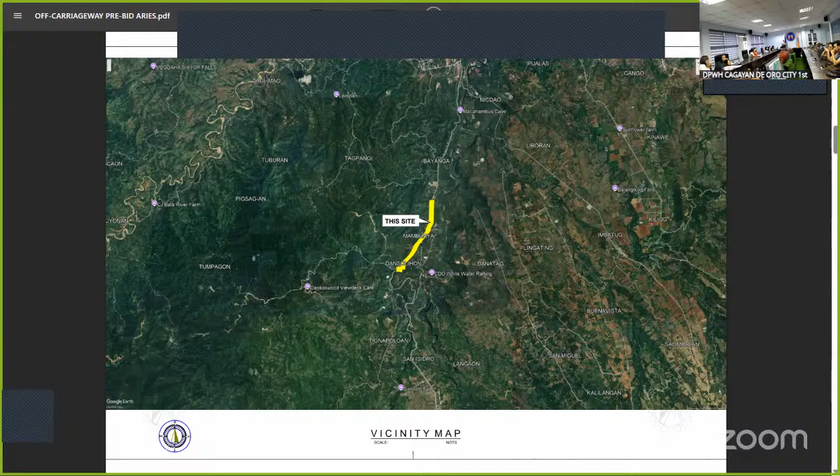For the general drawing, this is the vicinity map. It is located in Barangay Mambuaya and Barangay Dansolihon. This is the site development plan, wherein you can see the beginning and end section. These are the site images, showing the beginning and the end section.

For our typical drawings, the scope of work includes construction of sidewalk at the 15-meter offset with curb and gutter, and a shoulder of 2 meters, on both sides. There's also installation of solar LED roadway lightings, and we will be installing pavement markings throughout the net length of this project.

These are the PCCP details and geometric design standard drawings.

For the summary of quantities: provision of field office for the engineer, 7.47 months; permits and clearances, 1 lump sum; project billboard and signboard, 4 each; occupational safety and health program, 1 lump sum; traffic management, 5.5 months; mobilization and demobilization, 1 lump sum.

Surplus common excavation, 7,740 cubic meter; structure excavation common soil, 5,094.59 cubic meter; embankment from roadway structure excavation, 412.8 cubic meter; gravel fill, 982.27 cubic meter; aggregate base course, 3,440 cubic meter; Portland cement concrete pavement, unreinforced, 0.28 meters thick, 17,200 square meter.

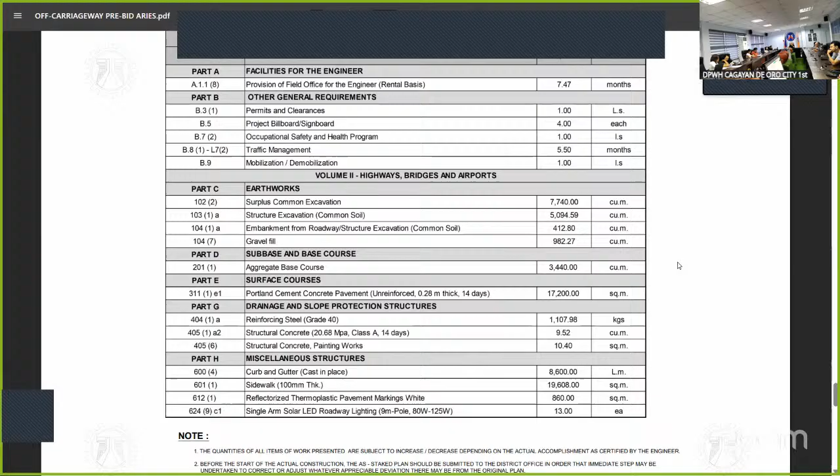So let me continue. So we have here the minimum equipment requirement. Backhoe, 1 leased. Dump truck, 2 leased. Bulldozer, 1 leased. Payloader, 1 leased. Motorized road grader, 1 leased. Vibratory roller, 1 leased. Water truck pump, 1 leased. Plate compactor, 1 owned. Transit mixer, 4 leased. Concrete vibrator, 2 owned. Concrete batch plant, 1 leased.

Concrete screeder, 1 owned. Concrete saw, 1 owned. Bar cutter, 1 owned. Joint sealer machine, 1 leased. Bar bender, 1 owned. 1-bagger mixer, 1 owned. Truck mounted crane, 1 leased. Cargo service truck, 21 to 25 metric ton, 1 leased. Cargo service truck, 2 to 5 metric ton, 1 leased. Cargo service truck, 9 to 10 metric ton, 1 leased.

Applicator machine, 1 leased. Kneading machine, 1 leased. Material testing apparatus, 1 owned. Two-way radio, 2 owned. And barricade flasher light, 11 owned. So for our pay items, we have here provision of the field office for the engineer, rental basis. The inclusion of this pay item is a 20-footer container van with ACU, furnished and maintained, or equivalent, with 3

tables and 3 chairs. So for the permits and clearances, these include NCIP permits and clearances as per memo order number R10 FBV 00395 series of 2025. And also you can see the specifications for our single arm solar LED roadway lightings. So again, the attachment of our road right of way of this project is still under ongoing investigation. So finalization of this project will be posted for the bid bulletin.

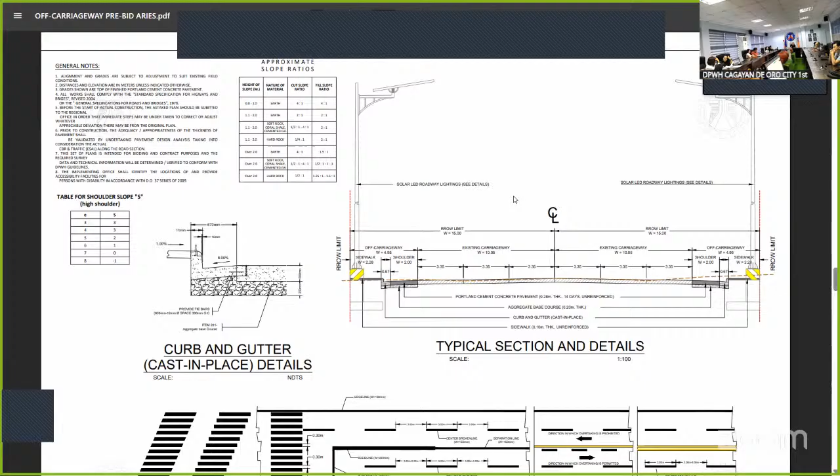Thank you, Engineer Harris. So do we have any questions or clarifications regarding the discussions of this project? Understand? How about from our online viewers? So since there's no questions regarding this project, now let's proceed to our second project.

26KH0078. Construction of public solar water system at Barangay Besigan, Cagayan de Oro City, Misamis Oriental. With approved budget for the contract of 9,898,808 pesos and 88 centavos. The details of this project will be discussed by Engineer Martin John Luis Amis. Can you now proceed, Engineer Martin.

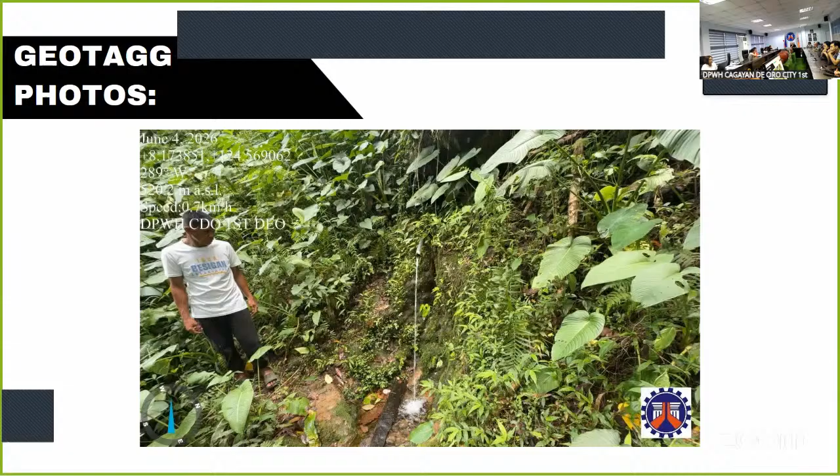Good afternoon, everyone. I will be discussing the construction of public solar water system at Barangay Besigan, Cagayan de Oro City. So this is the project location, located near Besigan Elementary School and Besigan National High School. These are the sample photos for the water source near the Besigan Elementary School. And this is the location for the water tank for the said project.

Typical details. So this is the sample perspective of the project. We have the control room, the panels for the solar and the water tank. This is the typical plan for the water tank. The ladder rung at 0.30 on center. We have the tie beam.

This is the plan for the concrete valve box consisting of 100 mm diameter gate valve, 75 mm diameter water meter, and a 75 mm diameter pipe to the consumers. Tie beam detail. We have the support at 320 mm diameter. We have the tie beam detail, the footing tie beam detail, and the reinforced beam detail.

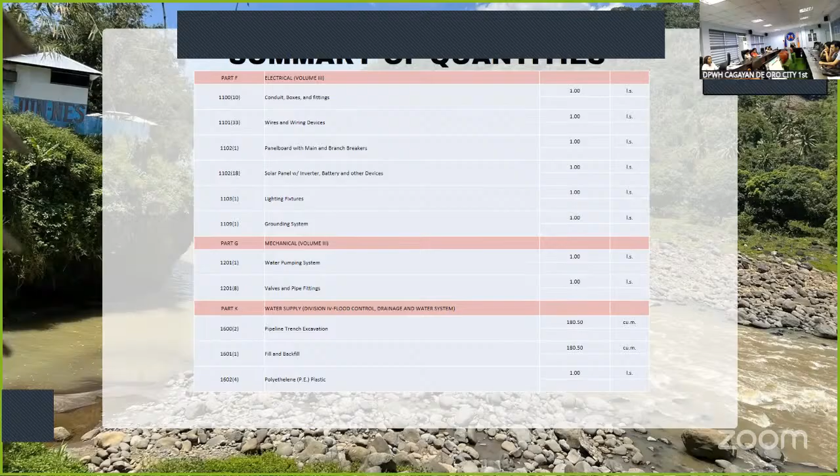For the electrical, conduit boxes and fittings, 1 lump sum. Wires and wiring devices, 1 lump sum. Panel board with main and branch breakers, 1 lump sum. Solar panel with inverter, battery and other devices, 1 lump sum. Lighting fixtures, 1 lump sum. Grounding system, 1 lump sum. Water pumping system, 1 lump sum. Valves and pipe fittings, 1 lump sum. Pipeline trench excavation, 180.50 cubic. Fill and backfill, 180.50 cubic. Polyethylene plastic, 1 lump sum.

Provision of field office for the engineer, rental basis: 40-footer container van with ACU, furnished and maintained, including 1 table and 3 chairs. Permits and clearances: building permit, electrical permit, mechanical permit, excavation permit, National Commission on Indigenous Peoples, and other miscellaneous. Formworks and false works: H-frame, shoring jack, adjustable U-head jack, adjustable base jack.

Cold water lines: reservoir tank, 50 mm diameter GI pipe, 50 mm by 90 degree GI elbow, 63 diameter GI pipe schedule 40, 50 mm by 30 GI nipple, 50 mm diameter drain plug, water meter, concrete valve box, Teflon tape.

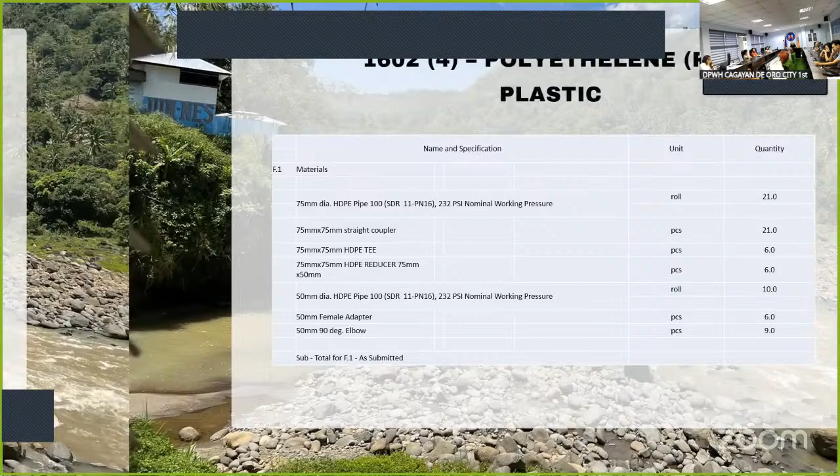Solar panel with inverter, battery, and other devices. So we will be using 550 watts monocrystalline solar panels, quantity 24, having a 3-phase 230 volts, 60 Hz Solis inverter, current transformers, and a 5.12 kilowatt battery. Polyethylene plastic: we will be using a 75 mm diameter pipe, 232 PSI nominal working pressure.

So equipment: 40-footer container van with ACU furnished and maintained, plate compactor, 1 lease, dump truck, 2 lease, boom truck, 1 lease, water truck, pump all models, 1 lease, bulldozer, 1 lease, payloader, 1 lease, backhoe, 1 lease, bar cutter, 1 owned, bar bender, 1 owned, 1 bagger mixer, 1 owned, concrete vibrator, 1 owned, cutting outfit, 1 owned, motorized road grader,

1 lease, drilling machine rig, 1 lease, cargo truck, 1 lease, material testing apparatus, 1 set owned, trailer for minor tools, 1 lease. That's all. Thank you.

Thank you, Engineer Martin. So do we have any questions or clarifications? Yes, sir. Good afternoon, sir.

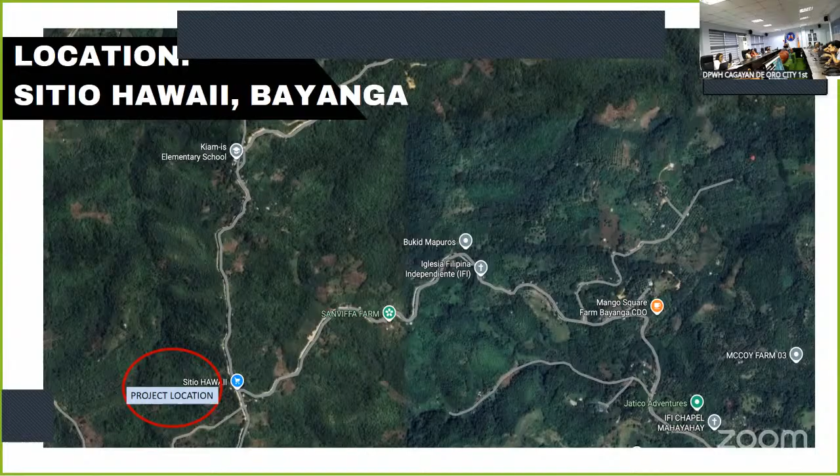Good afternoon, everyone. I will be discussing the project construction of public solar water system at Barangay Bayanga, Cagayan de Oro City. The content of this presentation is the project location, typical details, and the quantities. First is the location. The project is located in Bayanga. You can see it in the location map. And these are the site pictures as shown. The typical details of the project.

This is the elevation of the groundwater tank, the front view and the typical side view. This is the rear view and the typical section. And the details of the concrete valve box. Also, these are the details of the foundation plan, 3.4 by 3.4 meters, the beam details, the manhole details, and the reinforced beam detail.

This is the detail of the powerhouse: the front elevation, rear elevation, and the left side elevation. The height of the powerhouse is 3.74 meters with a dimension of 5 meters by 4 meters. And these are also the details of the tank stand, the details of the solar panel, concrete pedestal details, the powerhouse lighting layout, the single line diagram, and the details of the fence, which is 1.5 by 2.8.

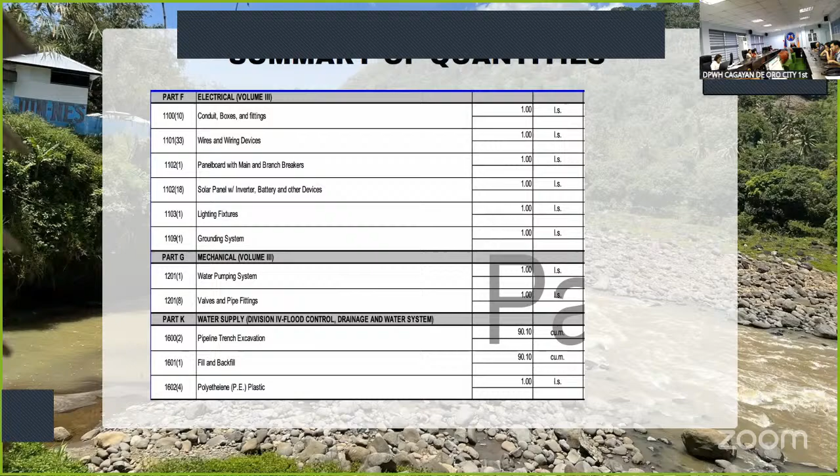Item 11-03-1, lighting fixtures, 1 lump sum. Item 11-09-1, grounding system, 1 lump sum. Item 12-01, water pumping system, 1 lump sum. Item 12-01-8, valve and pipe fittings, 1 lump sum. Item 1600-2, pipeline trench excavation, 90.1 cubic meter. Item 1601-1, fill and backfill, 90.1 cubic meter. Item 1602-4, polyethylene PE plastic, 1 lump sum.

This is the detail of the DUPA. The provisional field office for the engineer contains a 40-footer container van with ACU furnished and maintained, including 1 table and 3 chairs. This is the permits and clearances: the building permit and Bureau of Fire, drinking water analysis, electrical permit, mechanical permit, excavation permit, National Commission on Indigenous Peoples, which is the rituals and ceremonies, and miscellaneous and other expenses.

And this is the details for formworks and falseworks. And the details for cold water lines, reservoir tank, 50 mm diameter GI pipe, 50 mm by 90 mm diameter GI elbow, 60 mm by 63 mm GI pipe schedule 40, 8 pieces, 60 mm 90 diameter GI elbow, 4 pieces, 50 mm by 30 GI nipple, 2 pieces, 50 mm drain plug, 2 pieces, water meter, 1 concrete valve box, and 50 pieces platform tape.

Finishing hardware contains doorknob, 1 piece, and 4x4 loose pin hinges, 2 pieces. And the conduit boxes and fittings: 38 pieces, 30 meter by 20 mm diameter PVC conduit, 6 lengths of 3 meters, 32 mm diameter rigid steel conduit, 6 pieces, 40 mm diameter PVC conduit, 12 pieces PVC utility box, 8 pieces PVC junction box with cover, 1 piece 3/4 inch service entrance cap, 1 length 3/4 IMC, 5 GI conduit clamp, 1 kilowatt-hour meter, 10 20 mm diameter PVC coupling, 6 40 mm diameter PVC coupling, 1 flexible hose, 1 roll flexible hose.

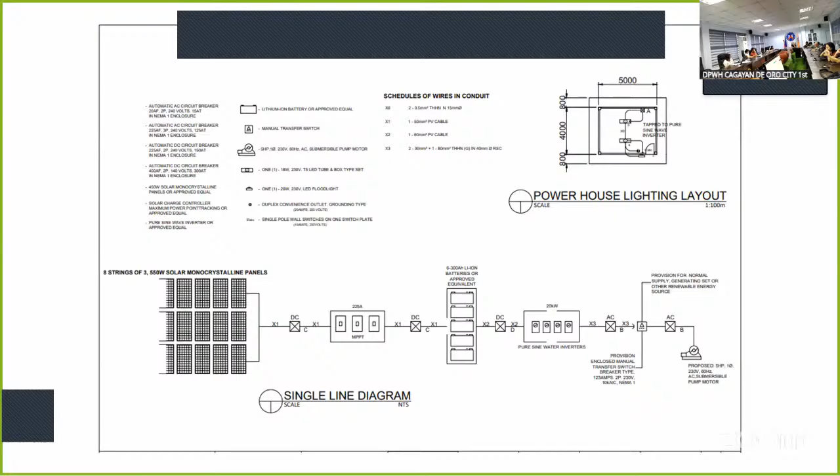We also have the details of the tank stand, which is 1.5 by 1.5 meters. The standard array PV module support layout. Solar panel concrete pedestal details. We also have the fence detail, the fence foundation and column details. So for the quantities of this project, the ABC of this project is 10,889,365.77. The calendar days of this project is 180 calendar days.

So summary of quantities: provision of field office for the engineer 6 months, project billboard, occupational safety and health program 1 lump sum, mobilization, demobilization 1 lump sum, clearing and grubbing 0.9 hectares, fencing chain link fence fabric 60 linear meter, structure excavation common soil 59.9 cubic meter, embankment from borrow 51.74 cubic meter, gravel fill 4.59 cubic meter.

Structural concrete class A 28 days 60.7 cubic meter, lean concrete 4.59 cubic meter, reinforcing steel deformed grade 40 4,195.22 kilograms, reinforcing steel deformed grade 60 3,480.83 kilograms, formworks and falseworks 1 lump sum, cold water lines 1 lump sum, plumbing works 1 lump sum, finishing hardware 1 lump sum, cement plaster finish 520 square meter.

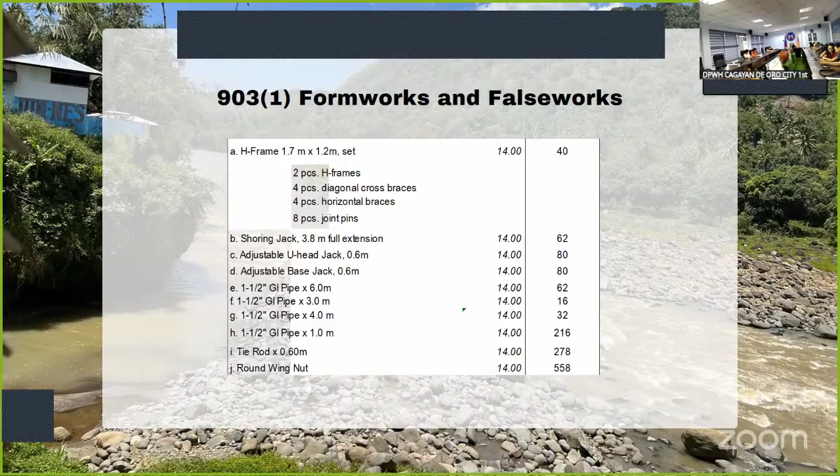Summary of lump sum of the following. Provision of the field office for engineers, 40-footer container van with ACU furnished and maintained, including one table and 3 chairs. So these are the materials or equipment for occupational safety and health. And for the formworks and falseworks. We also have the cold water lines, which is for reservoir tank, 50 mm diameter GI pipe, 50 mm by 90 mm diameter GI elbow, 63 mm diameter GI pipe, schedule 40.

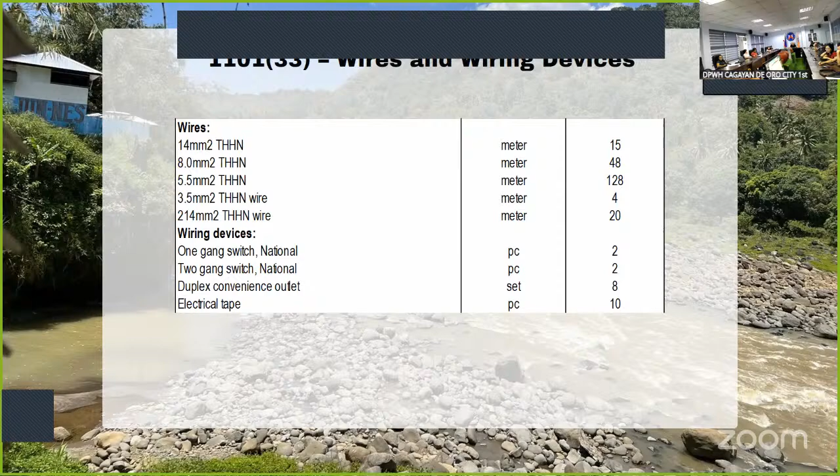We also have for the finishing hardware, door knobs, 4x4 loose pin hinges. For the conduit and boxes and fittings, for the wires and wiring devices, we also have for the panel board and main and branch breakers. And for the solar panel with inverter, battery, and other devices.

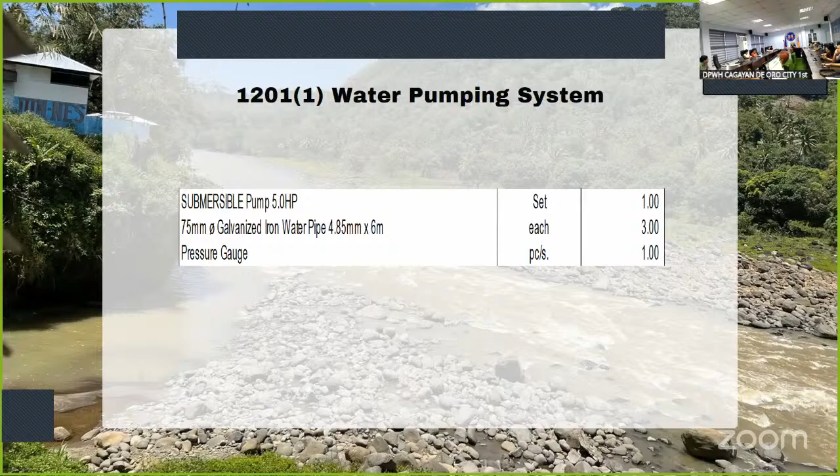For lighting fixtures, grounding system, water pumping system, valves and pipe fittings, and for polyethylene plastic, we also have 75 mm diameter pipe.

And for the equipment: plate compactor, 1 lease; dump truck, 2 lease; boom truck, 1 lease; water truck, 1 lease; bulldozer, 1 lease; payloader, 1 lease; backhoe, 1 lease; bar cutter single phase, 1 owned; bar bender 3 phase, 1 owned; bagger mixer, 1 owned; concrete vibrator, 1 owned; cutting outfit, 1 owned; motorized road grader, 1 lease; drilling machinery, 1 lease; cargo service truck, 1 lease; material testing apparatus, 1 set owned; trailer for minor tools, 1 lease.

That's all for this project. Thank you.

Thank you, Engineer Francis. Okay, is this project also still subject for approval? Do we have any clarifications? Understand? Our online viewers understand. Okay, thank you. Since there are no more questions regarding this project, let's now proceed to our 5th project.

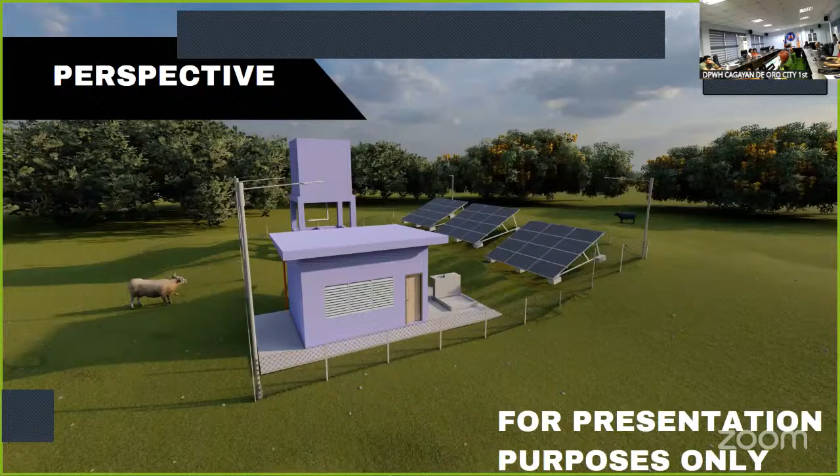This is the project location. Geotag photos - this is the source, and this will be the location for the water tank. Typical details, perspective, water tank typical details, the rear view, concrete valve box, control panel, a tank stand perspective, solar panel concrete pedestal details, the fence details, and the quantities.

So summary of quantities: provision of field office for the engineer, rental basis, 6 months. Project billboard signboard, 2 each. Occupational safety and health program, 1 lump sum. Mobilization, demobilization, 1 lump sum. Clearing and grubbing, 0.45 hectares.

Fencing, chain link fence fabric, 60 linear meter. Structure excavation, common soil, 59.9 cubic meter. Embankment from borrow, 51.74 cubic. Gravel fill, 4.59 cubic. Structural concrete class A, 28 days, 60.70 cubic. Lean concrete, 4.59 cubic. Reinforcing steel deformed grade 40, 4,195.22 kilograms. Reinforcing steel deformed grade 60, 3,480.83 kilograms. Formworks and false works, 1 lump sum.

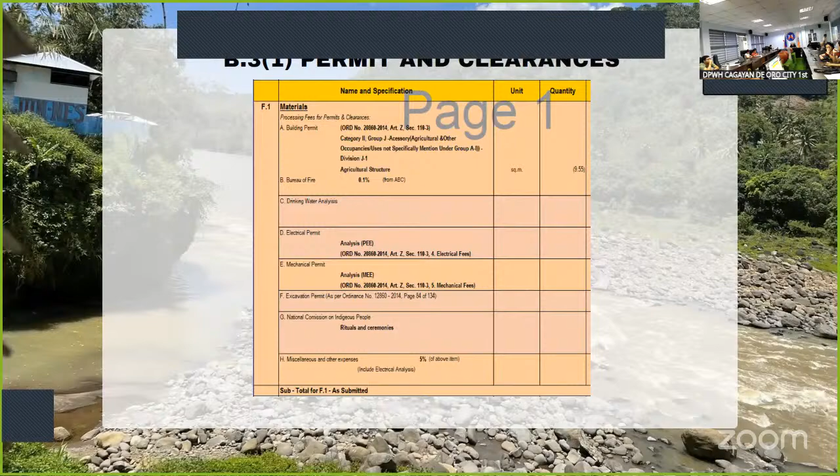Provision of field office for the engineer, rental basis: 40-footer container van with ACU, furnished and maintained, including 1 table and 3 chairs. For the permits and clearances, formworks and false works, cold water lines, finishing hardware, conduits boxes and fittings, panel board with main and branch breakers, lighting fixtures, grounding system, water pumping system, valves and pipe fittings, solar panel with inverter, battery and other devices, polyethylene plastic.

Equipment: plate compactor, 1 lease; dump truck, 2 lease; boom truck, 2 lease; water truck, 1 lease; bulldozer, 1 lease; payloader, 1 lease; backhoe, 1 lease; bar cutter, 1 owned; bar bender, 1 owned; bagger mixer, 1 owned; concrete vibrator, 1 owned; cutting outfit, 1 owned; motorized road grader, 1 lease; drilling machine rig, 1 lease; cargo truck, 1 lease; material testing apparatus, 1 set owned; 1 trailer, 1 lease. That's all.

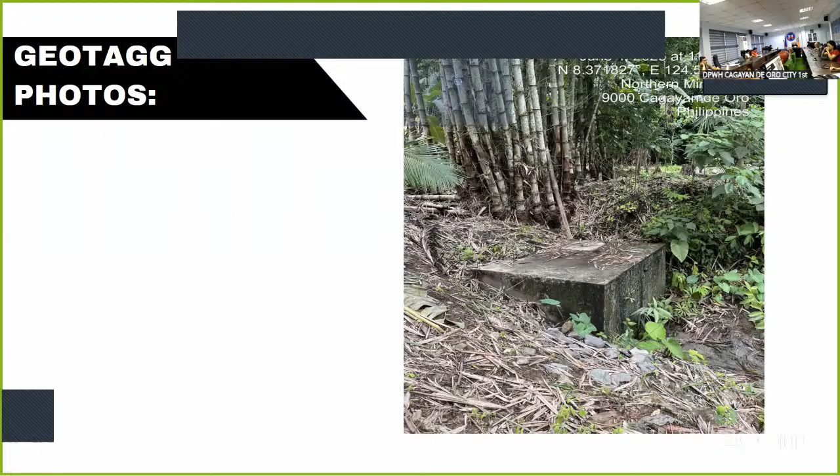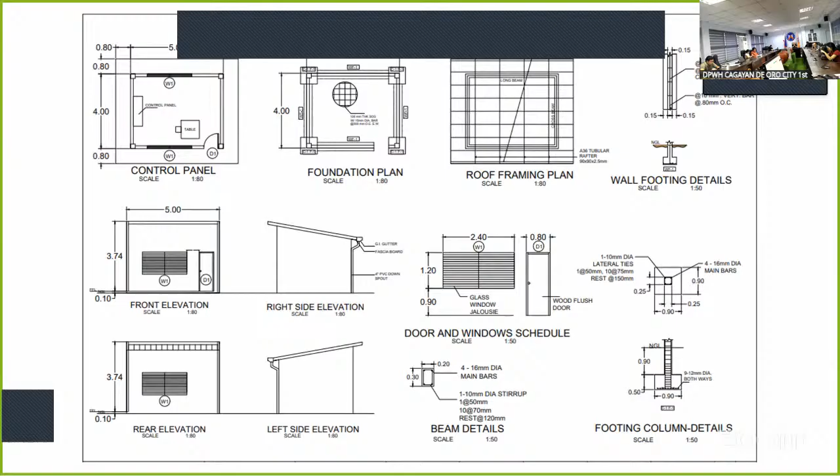For the details of our foundation plan, we will have 3.4 by 3.4, having a tie beam of 20mm reinforcing bar and 220mm for the bottom bars. For our control panel, we'll have a dimension of 4 meters by 5 meters, having a height of 3.74 from the top of our slab.

For the top stand, having a dimension of 1.5 by 1.5, we'll provide 8 tap stands. The location will depend on the end user. This is the detail of our solar panels. For the fencing detail, we'll use 2 inches by 2 inches cyclone wire, spaced at 2 meters, having a pedestal of 0.3 and using a GI pipe of 1 and 1/2 for the column.

For the quantities, this is the approved budget of the contract. We have 9,898,808.81 with a calendar duration of 180 days.

For the summary of quantities: provision of field office for the engineer, 6 months. Permit and clearances, 1 lump sum. Project billboard, 2 each. Occupational safety and health, 1 lump sum. Mobilization and demobilization, 1 lump sum.

Clearing and grubbing, 0.45 hectares. Fencing, chain link fence fabric, 60 linear meters. Structure excavation, 59.9 cubic meters. Embankment from borrow, 51.74 cubic meters. Gravel fill, 4.59 cubic meters.

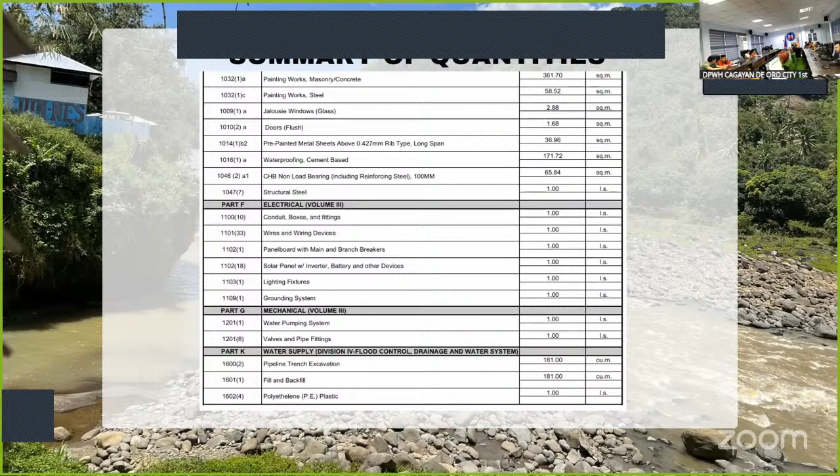Pipeline trench excavation, 181 cubic meters. Fill and backfill, 181 cubic meters. Polyethylene plastic, 1 lump sum.

For our cold water lines, this is the fittings for our reservoir tank. For the finishing hardware, for our control panels. Then for the conduit, boxes and fittings, these are the details as shown.

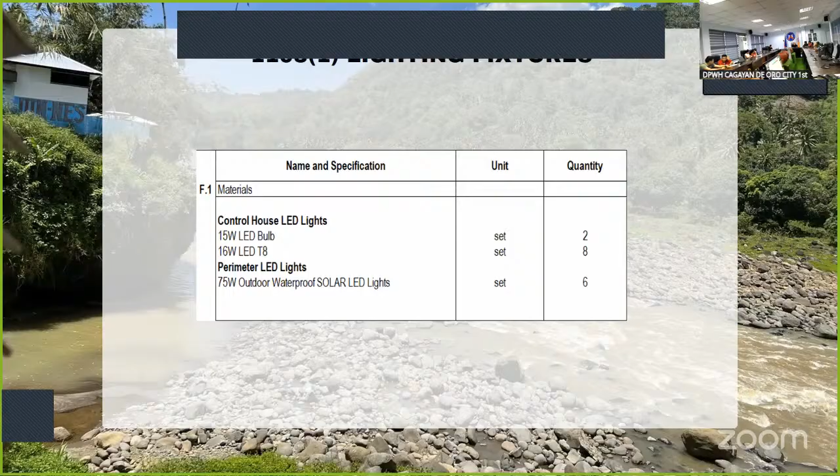For the wires and wiring devices, and the panel board with main and branch breaker. For the lighting fixtures, for the control house, we'll use a 15 watt LED bulb, 16 watt LED tube, and we'll use solar LED light, 75 watts, for the outer fence. For the grounding system, these are the details.

For the water pumping system, we will use a submersible pump, 5 HP, to cater to the elevation head of 40 meters.

So this is the equipment requirement. As shown, we'll have a plate compactor, 1 lease, dump truck, 2 lease, boom truck, 1 lease, water truck, 1 lease, bulldozer, 1 lease, payloader, 1 lease, backhoe, 1 lease, bar cutter, 1 owned, bar bender, 1 owned, one-bagger mixer, 1 owned, concrete vibrator, 1 owned, cutting outfit, 1 owned, motorized road grader, 1 owned, cargo service truck models, 1 lease, material testing apparatus, 1 set owned, trailer for equipment, 1 lease.

Good afternoon once again, everyone. Presenting contract ID 26KH0083 with a project title of Construction of Public Solar Water System at Barangay Baikingon, Cagayan de Oro City, Misamis Oriental, with a calendar days of 151 days. Location, Barangay Baikingon, Cagayan de Oro City, with the approved budget for the contract of 9,898,120 pesos and 67 centavos.

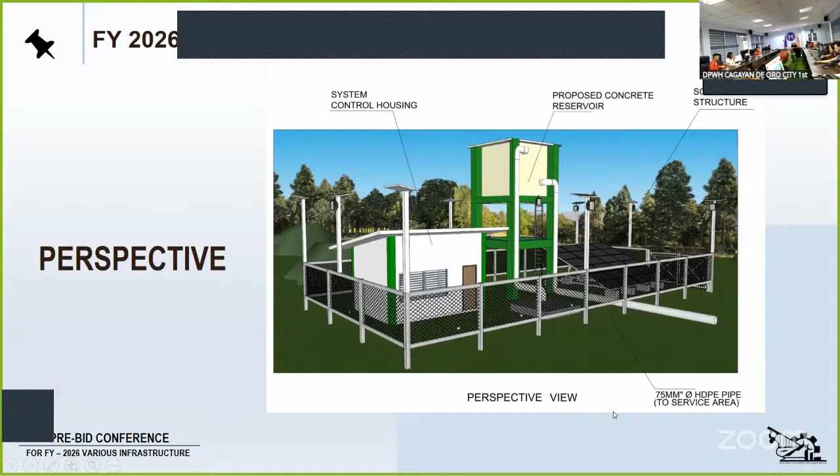Scope of work is the construction of solar water deep well. This is the location. Landmark is at Ibal Store, 100 meters to their barangay hall, before their barangay hall. This is the site photo. And this is the proposed perspective with a control house, concrete reservoir, solar structure, and the HDPE pipe.

This is the typical detail for deep well. Please note that georesistivity test is included in this with the depth of 100 meters. This is the proposed concrete reservoir, the control house, the solar panel, and retaining wall.

This is the top stand details and the perspective with length, HDPE pipe length of 990 meters and a total number of tap stand 11 pieces.

For the summary of quantities, Part A, A1.18, provision for a field office for the engineers, rental basis, 5.03 months. And for Part B, B.5, project billboard signboard, 4 each. For B.7(2), occupational safety and health program, 1 lump sum. For B.9, mobilization and demobilization, 1 lump sum. And for Part H, the miscellaneous structure, item 604.2, fencing chain link fence fabric.

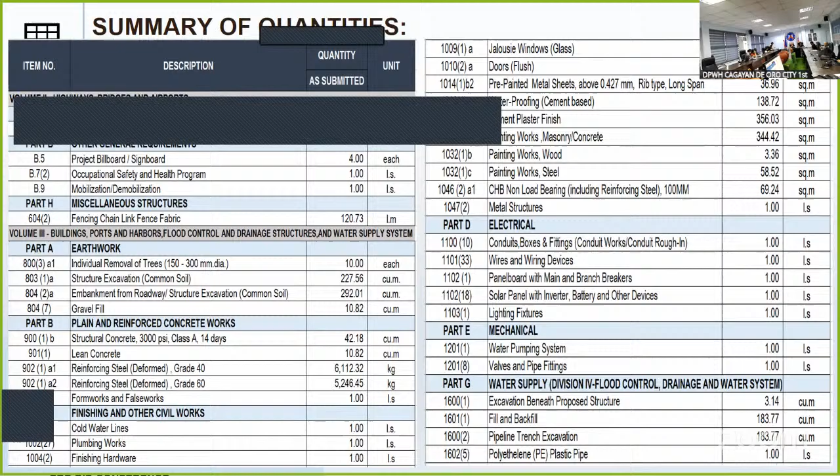And for item 1103, 1 lighting fixtures, 1 lump sum. And for part E, mechanical, 1,201, 1 water pumping system, 1 lump sum. And for item 1,201, 8 valves and pipe fittings, 1 lump sum.

And for part G, 1,600 1 excavation beneath proposed structure, 3.14 cubic meters. And for item 1,601 fill and backfill, 183.77 cubic meters. And for item 1,600 2 pipeline trench excavation, 183.77 cubic meters. And lastly, for item 1,602 5 polyethylene plastic pipe, 1 lump sum.

And for the minimum equipment requirement: trailer for equipment, 1 leased; plate compactor, 1 leased; dump truck, 2 leased; boom truck, 1 leased; water truck pump, 1 leased; bulldozer, 1 leased; payloader, 1 leased; backhoe HD 823, 1 leased; bar cutter single phase, 1 owned; bar bender 3-phase, 1 owned; chainsaw, 1 leased; 1 bagger mixer, 1 owned; concrete vibrator, 1 owned; welding machine, 1 leased; cutting outfit, 1 owned; backhoe wheel mounted, 1 leased; motorized road grader, 1 leased; drilling rig, 1 leased; cargo service truck, 1 leased; and lastly, material testing apparatus, 1 set owned.

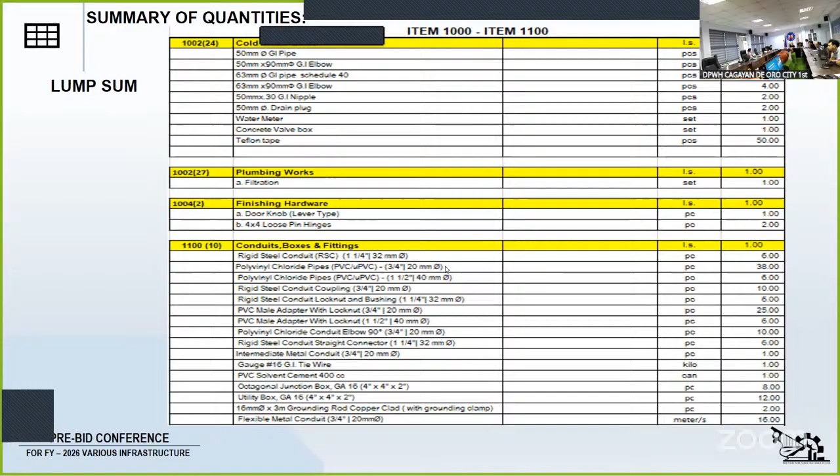And for items 1,000 to 1,100, for the cold water line, plumbing works, finishing hardware, conduit, boxes and fittings, wires and wiring devices, panel board with main and branch breakers, and solar panel with inverter, battery, and other devices, and for the lighting fixtures and lamps, and for the water pumping, the valves and pipe fittings, water pumping system, and the polyethylene plastic pipe. The quantity of this project is subject for bid bulletin. That's all for this project. Thank you.

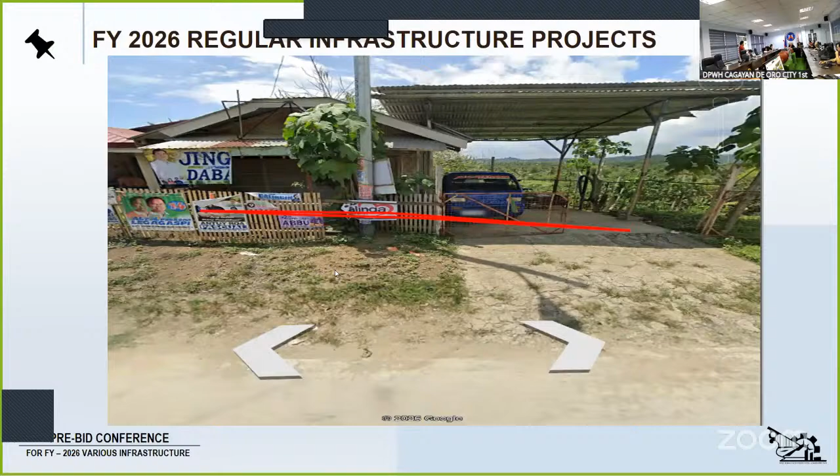Thank you, Engineer Shilani Gelfroy. Do we have any clarifications or questions? How about from our online viewers? So again, this project is subject for bid bulletin. And now let's proceed to our 8th project.

Asset preservation, construction, upgrading, rehabilitation of drainage along national roads, secondary roads, CDO-Airport-Bukidnon Road, Kilometer 1445 plus 400 to Kilometer 1446 plus 040, Cagayan de Oro, with an approved budget for the contract of 89,685,753 pesos and 82 centavos. The details of this project will be discussed by Engineer Kim Carr. You may now proceed, Engineer Kim Carr.

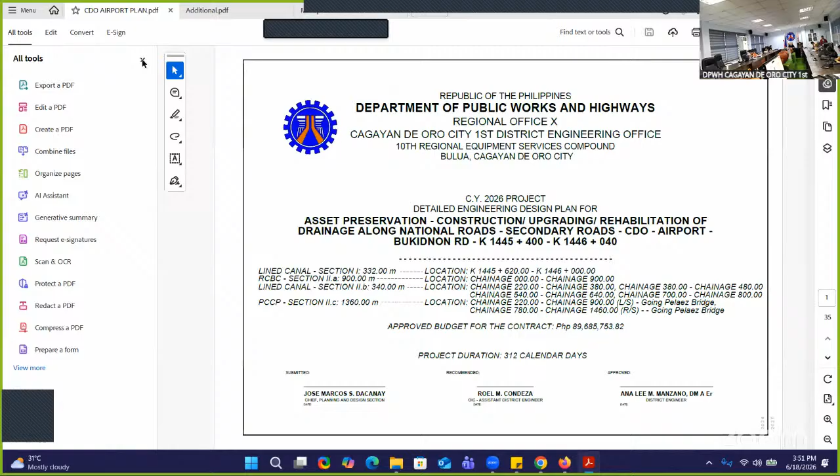Once again, good afternoon, ma'am and sirs, and to all observers and online viewers. I'll be discussing the asset preservation, construction, upgrading, rehabilitation of drainage along national roads, secondary roads, CDO-Airport-Bukidnon Road, K 1445 plus 400 to K 1446 plus 040. So these are the locations of the structures.

Lined Canal, Section 1, 332 meters, location 1445 plus 620 to 1446. The RCBC, Section 2A, 900 meters, location chainage 0 to chainage 900. Lined Canal Section 2B, 340 meters, chainage 220 to chainage 380, chainage 380 to 480. Error. Chainage 540 to chainage 640 and chainage 700 to chainage 800.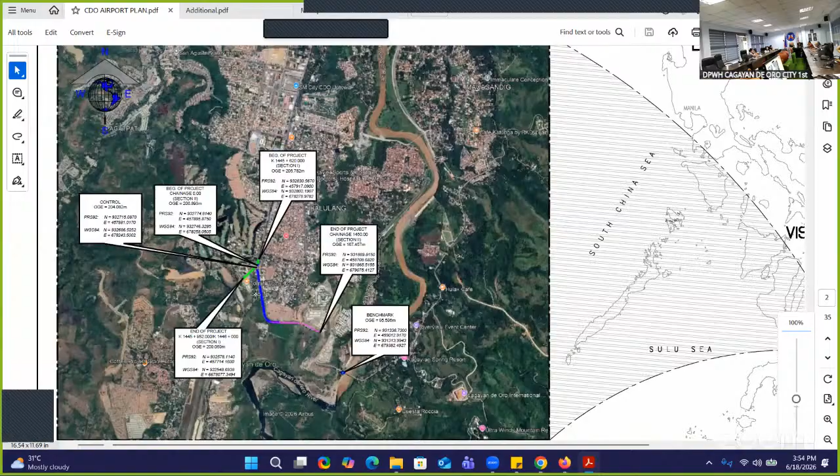This is the vicinity map. The known landmarks are the SM CDO Uptown, Thompson Toms Coffee, Xavier Heights. The location is in Taguanao. This is the location map indicating its PRS 92, or the Philippine Reference System.

This is the site development map, with its closest landmarks, Thompson Toms, Fukuro, Roseville School, Uptown. This is the Portland cement concrete pavement detail. Traffic management.

Under traffic management, we have 4 each of speed restriction, roadwork ahead, roadwork, workmen ahead, prepare to stop; temporary hazard marker 1 each; concrete safety barrier 47 each since it involves deep excavation; construction safety fence 48 each; temporary bollards at 5 meters apart 16 each. For equipment, two-way radio 2 each with lifespan consideration of 2 years, barricade flasher light 11 each.

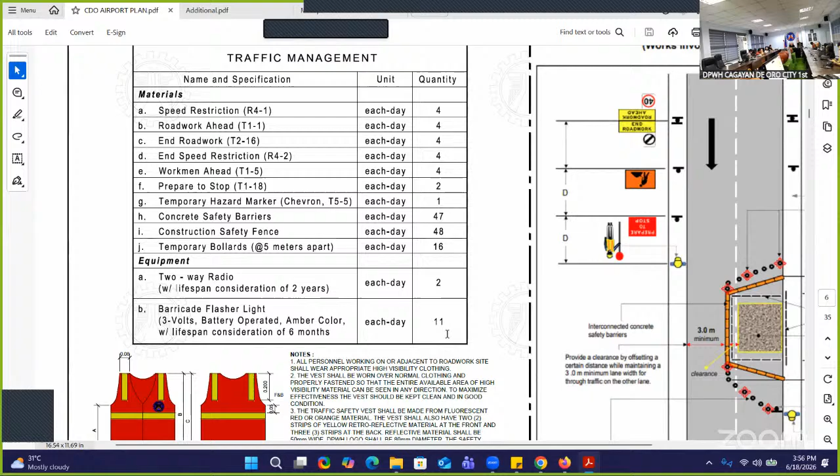This is the layout. There will be a specific traffic management layout for this project. These are the typical details under traffic management. Project billboard details. These are the typical sections, indicating the station limits and the pay items involved. We have the typical section, existing roadway with lined canal, station limit 1445 plus 620 to 1445 plus 952 or K 1446, curb and gutter and lined canal. This is the typical detail for roadway with RCBC.

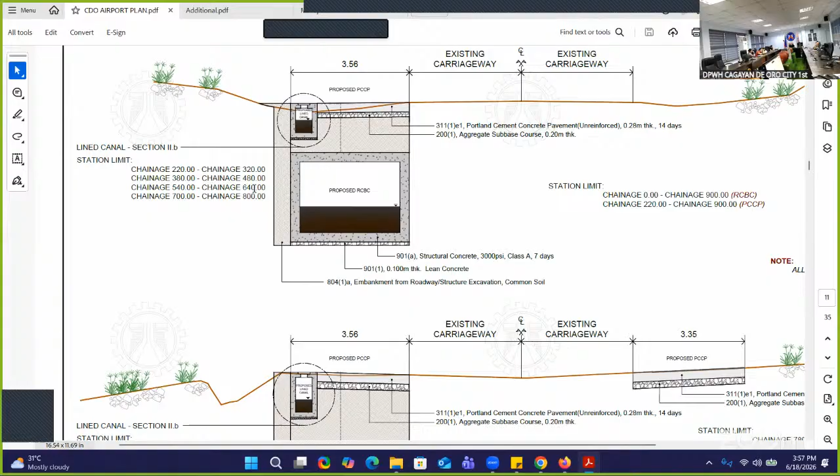So this is the typical detail for existing roadway with lined canal, PCCP, and RCBC detail. So as shown in the screen, there's a line canal which is in the front page of this plan. So lined canal section 2.b with station limits. So na siya proposed PCCP, aggregate subbase course 0.20 meter thick, structural concrete, 0.1 meter thick na lean concrete, embankment from roadway excavation, roadway structure excavation side.

So this is the typical detail for line canal. So under section station limit of K 1445 plus 620 to K 1445 plus 952. So the plan view, fixed and removable cover. So every 10 meters na siya fix. 1.20 meters is the removable cover. So this is the detail. Dimensions. Line canal detail section 2. We have the fix. RCBC schedule detail.

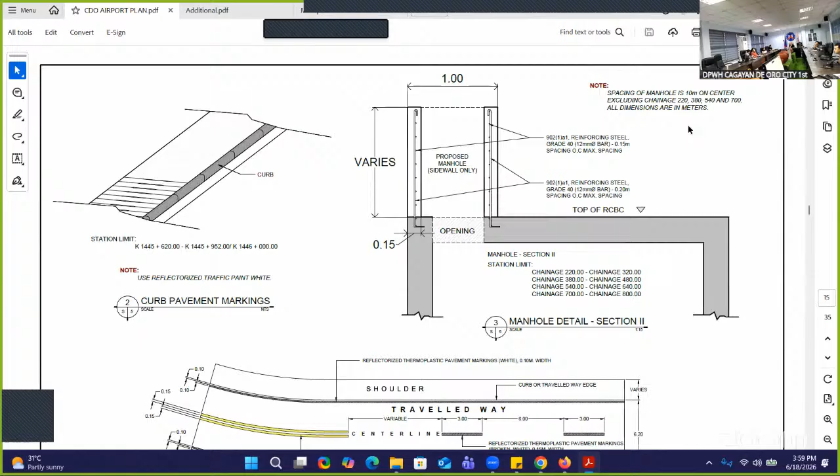Curb pavement markings. Reflectorized traffic paint white. So indicated na po ang station limits. So this is the detail for manhole. Na siya RCBC manhole, then sa taasan isang PCCP. We also have the reflectorized center and edge line marking. So naana po naka-indicate dani sa note. So edge only ang base sa PA item, edge only lang ang atong itong gamitan ng reflectorized nga white.

So this is the typical detail for the steel grating. Manhole cover for RCBC. This is the detail. Cross sections. So summary of quantities. So these are the pay items for this project. So we have E.1.18 provision of field office for the engineer, rental basis, 10.4 months. E.1.32 provision of survey equipment for the assistance to the engineer, 1 lump sum. B.31 permits and clearances, 1 lump sum.

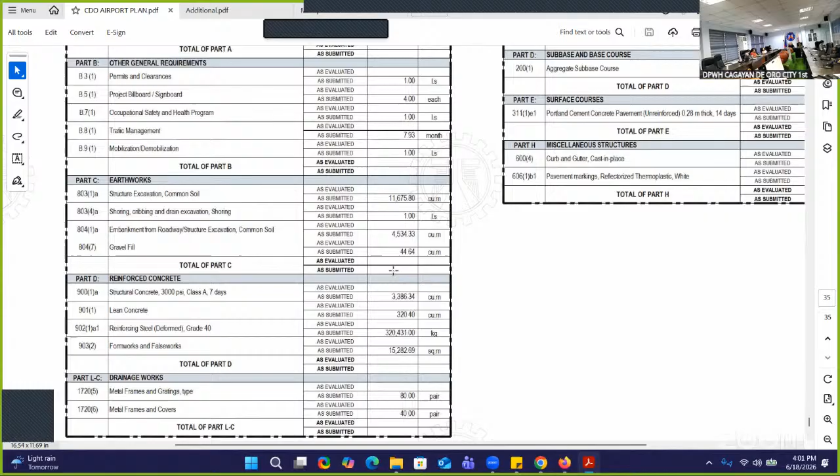B.51 project billboard or signboard for each. B.71 occupational safety and health program, 1 lump sum. B.81 traffic management, 7.93 months. B.91 mobilization, demobilization, 1 lump sum. 8031A structure excavation, common soil, 11,675.80 cubic meter. 8034A, shoring, cribbing, and drain excavation, shoring, 1 lump sum. 8041A, embankment from roadway or structure excavation, common soil, 4,534.33 cubic meter. 8047, gravel fill, 44.64 cubic meter.

9001A, structural concrete, 3,000 PSI, class A 7 days, 3,386.34 cubic meter. 9011, lean concrete, 320.40 cubic meter. 9021 A1, reinforcing steel, deformed, grade 40, 320,431 kilograms. 9032, formworks and false works, 15,282.69 square meter. 17205, metal frames and grating type, 80 pairs. 17206, metal frames and covers, 40 pairs.

1013 B3, removal of actual structure, obstruction, 0.23 meter thick PCCP unreinforced at 3,204 square meter. 1016, removal of actual structure, obstruction, concrete, 4.73 cubic meter. 1022, surplus common excavation, 1,026.48 cubic meter. 2001, aggregate sub-base course, 889.96 cubic meter. 3111 E1, Portland cement concrete pavement unreinforced, 0.28 meter thick, 14 days, 4,366.80 square meter. 6004, curb and gutter cast in place, 332 linear meter. 6061 B1, pavement markings reflectorized thermoplastic white, 247.34 square meter.

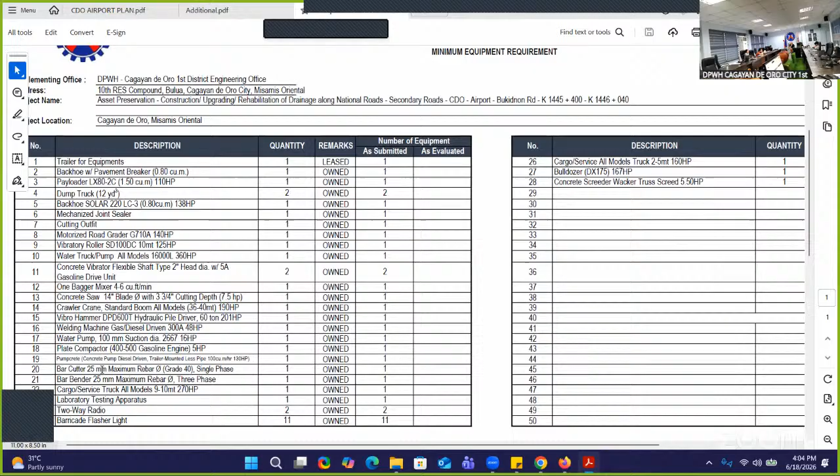Water pump, 1 owned. Plate compactor, 1 owned. Pump crete, 1 owned. Bar cutter, 1 owned. Bar bender, 1 owned. Cargo or service truck na 9 to 10 metric tons, 1 owned. Laboratory testing apparatus, 1 owned. Two-way radio, 2 owned. Barricade flasher light, 11 owned. Cargo or service truck na 2 to 5 metric tons, 1 owned. Bulldozer, 1 owned. Concrete screeder, 1 owned. So this is the additional.

Under E.1.18, provision of field office for the engineer, rental basis. Inclusion is 20-footer container van with ACU, 2 chairs and 1 table or equivalent. So meaning, pwede siya mag-rent kung dili possible ang kaning container van. So pwede ra mag-rent kung van. So under E.1.32, provision of survey equipment for the assistance of the engineer. So inclusion 1 set, drone with RTK module, extra battery and LiDAR 360 software, perpetual license, 1 unit na RC Plus 2 controller, 1 unit nga Zenmuse, kani siya kay LiDAR camera ni siya.

So 6 pieces nga TB65 intelligent battery, and 2 units nga laptop na specialized for data processing. So sa specs, so we have i9 or R9 nga latest gen, 128 gigabyte nga RAM, DDR5.

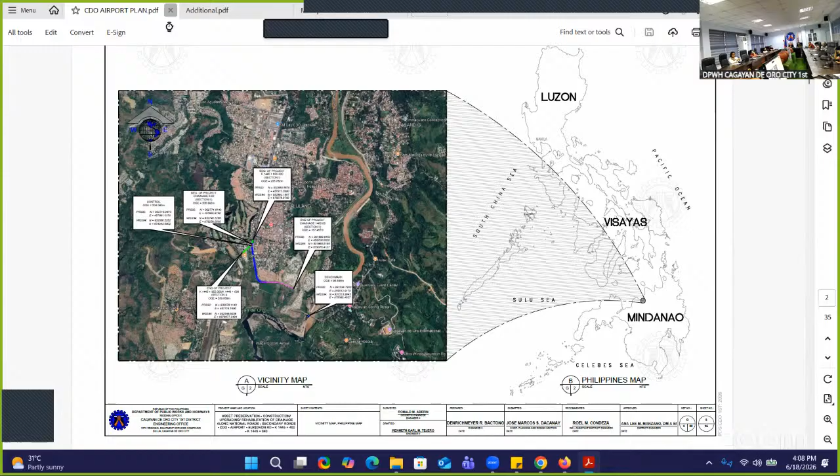Okay, thank you, Engineer Kenneth Carl Tejero. So do we have any clarification or questions regarding the discussion details of this project? There is none. How about from our online viewers? So there is none. So since there are no clarification questions, the details of the projects on

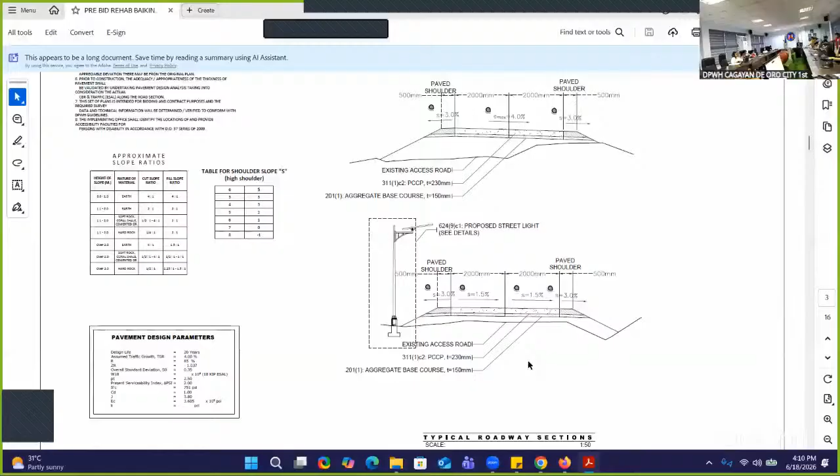This is the location of the project near the river at Barangay Baikingan. This is the typical roadway detail with a total road width of 4 meters and PCCP thickness of 0.23 meters. General notes for street lights. Typical detail for the roadway street lights, solar street lights, I mean.

And for the minimum equipment requirement: 2-way radio, 3 owned; barricade flasher light, 10 owned; trailer for equipment, 1 leased; trailer for minor tool, 1 leased; payloader, 1 leased; dump truck, 2 leased; concrete saw, 1 owned; bulldozer, 1 leased; backhoe, 1 leased; motorized road grader, 1 leased; vibratory roller, 1 leased; water truck pump, 1 leased; concrete vibrator, 2 owned; concrete spreader, 1 owned; bar cutter, single

phase, 1 owned; mechanized joint sealer, 1 owned; material testing apparatus, 1 set owned; cargo service truck, 1 leased; 1 bagger mixer, 1 owned; plate compactor, 1 leased; bar bender, 3 phase, 1 owned. I'm sorry for this, it was repeated. And last is the truck mounted crane, 1 leased.

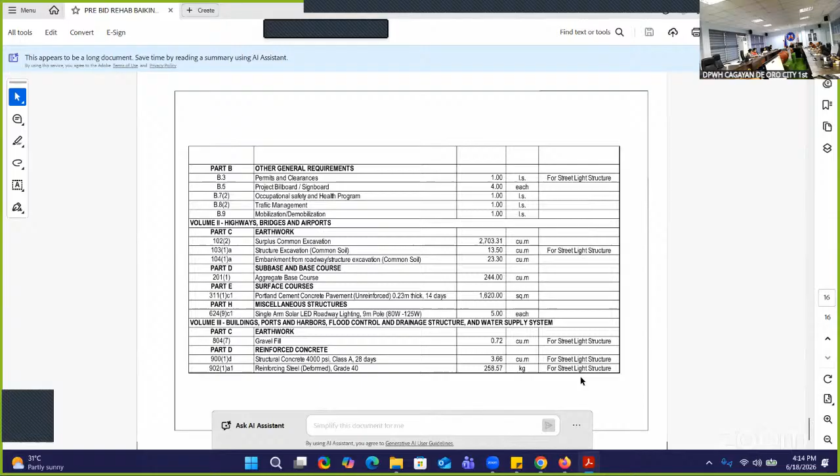Quantities of this project are subject for bid bulletin. That's all for this project. Thank you. Thank you, Engineer Shinami Ilatori. So, do we have any clarifications or questions regarding the details of this project? Very standard. How about from our online viewers? Very standard.

So now at this point, I would like to call back again Engineer Cagayan because he has additional information regarding the item on survey equipment. So go, Engineer Cagayan.

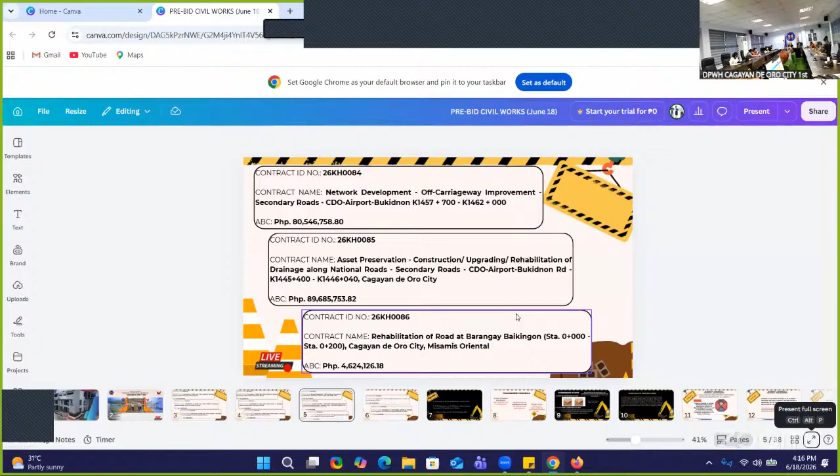Thank you, Engineer Cagayan. So with that, let's now proceed to our project number 10. Contract ID 26KH0087. Replacement of Bulao Bridge, Barangay Ipunan, Cagayan de Oro City, Misamis Oriental. With an approved budget for the contract of 130,209,681 pesos and 9 centavos. So the details of this project will be discussed by Engineer Raquel Lopez. So you may now proceed, Engineer Raquel.

Good afternoon, everyone. I will be presenting the details of the project 26KH0087, replacement of Bulao Bridge, Barangay Ipunan, Cagayan de Oro City, Misamis Oriental, with an appropriation amount of 134,934,000, ABC amount of 130,209,681.0.

So, brief project description. The project is located at Barangay Ipunan, Cagayan de Oro City. Scope of works in general is replacement of bridge as per plan. Contract duration 269 calendar days as advertised. Calendar days is subject for bid bulletin. Fund source GAA 2026. Major category of work BCCDP bridges, construction, concrete, superstructure with driven piles. Similar category of work BRTCDP bridges, retrofitting, concrete with driven piles, superstructure with driven piles.

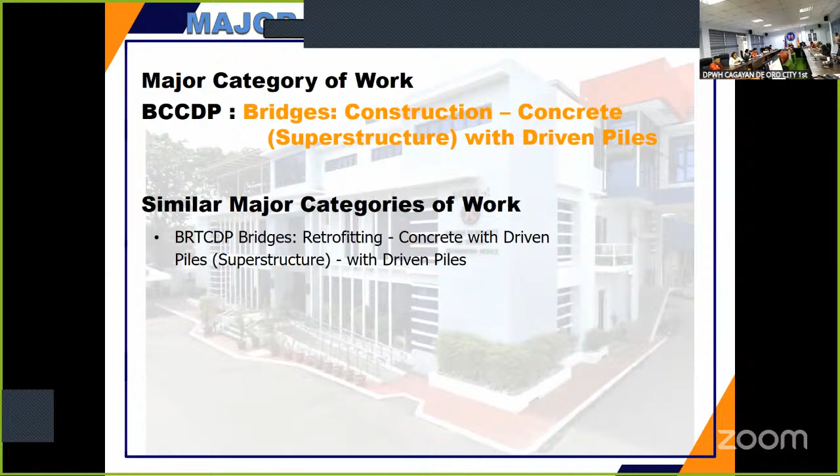So this is the location of the project, the existing modified Mabey Johnson steel bridge connecting two barangays, Barangay Ipunan and Barangay Kanituan. Abutment A of this bridge is located at the Ipunan side, and abutment B is at the Kanituan side. So this is the site development plan. This project does not only involve the construction of bridge, but as well as its approaches, the road leading to the bridge, and slope protection structure. So this is the proposed design of the layout of the bridge.

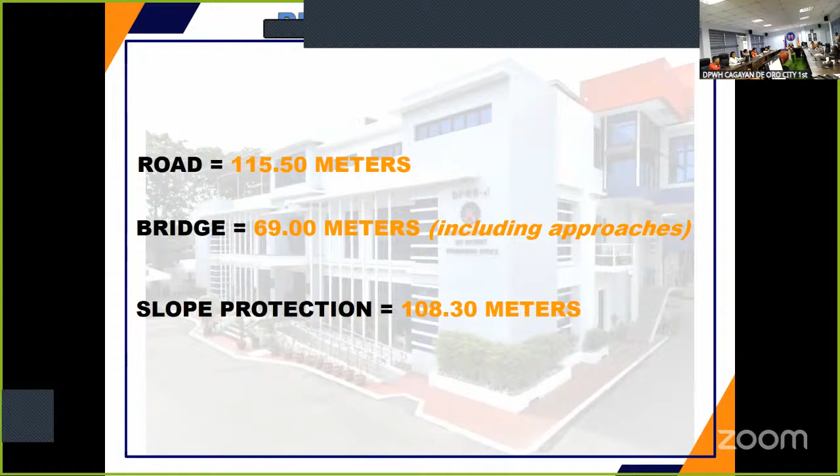So if you're not familiar with the said bridge, this is the existing condition of the Bulao Bridge. It has metal panel decks, which have deteriorated. So it shall be replaced with a pre-stressed concrete deck girder bridge. The road component of this project includes 115.5 meters. This is the road going to the bridge, and the bridge itself is 69 meters, including approaches. Slope protection 108.30 meters.

So the details of the bridge: the type of bridge is a pre-stressed concrete deck girder bridge. The girder is type 4B-2 girder. Length per span is 30 meters. Number of spans 2. So the length of the bridge is 60 meters and number of piers 1. So this is the perspective of the bridge. We will include also roadway lighting. This is the general bridge plan and elevation and the typical details of the bridge plan. This is the typical details of the road section.

Since our bridge will be elevated from the existing elevation of the bridge, by about 0.8 meters, it follows that the road will have a grade approaching towards the bridge. So musaka gamay po ang road. That's why we have a component of a retaining wall for the portion near the abutment, pasaka na sa tulay. So this is the typical details of a retaining wall. Details, cross-section of the pier and the abutment. And this is the typical details of the slope protection.

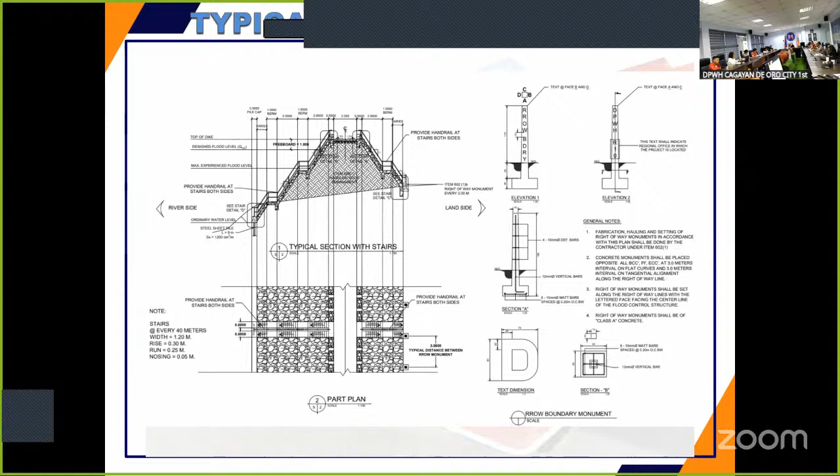So these are the summary of quantities. Part A, facilities for the engineer. Item A.1.18, provision of field office for the engineer, rental basis, 8.89 months. Item A.1.114, provision of laboratory testing equipment, apparatus, and publications for the engineer, 1 lump sum. Other general requirements, B.3, permits and clearances, 1 lump sum. B.5, project billboard signboard, four each. B.72, occupational safety and health program, 1 lump sum. B.81, traffic management.

This is a correction, Annie. This is supposed to be in the bid bulletin. So I will just read the as advertised, 1 month. B.9, mobilization, demobilization, 1 lump sum. B.18.1, Craneway, 1 lump sum. Part C, earthworks, item 101, clearing and grubbing, 0.36 hectares. Item 103A1, individual removal of trees, 42 each. Item 101.1, removal of structures and obstruction, 1 lump sum.

102.2, surplus common excavation, 2,697.39 cubic meters. Item 103.1A, structure excavation, common soil, 469.31 cubic meters. 103.2B1, bridge structure excavation, soft rock, 2,289.69 cubic meters. Item 103.3, foundation fill, 12 cubic meters. 103.5B, shoring, cribbing, and other related works, 1 lump sum. Item 104.2A, embankment from borrow, common soil, 221.77 cubic meters. And Part D, item 201, aggregate surface course, 46.49 cubic meters. Item 2011, aggregate base course, 135.75 cubic meters.

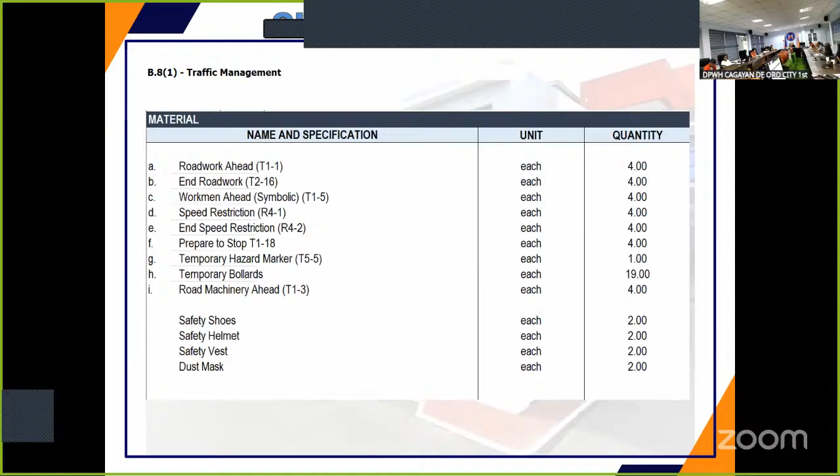For the traffic management item, we have a signage of roadwork ahead for each, end roadwork four each, workmen ahead for each, speed restrictions for each, end speed restrictions four each, prepared to stop for temporary hazard marker 1, temporary bollards 19, road machinery ahead 4, safety shoes, safety helmet and vest, and dust mask.

For the craneway, I will just flash the details of the craneway and the shoring cribbing. The details are indicated in the plans, which will be included in the bid bulletin.

For the minimum equipment requirement, air compressor 2 own, applicator machine 1 own, backhoe 1 lease, backhoe wheel mounted with breaker 5 own. Bid bulletin ni siya, subject for bid bulletin. Bar bender 1 own, bar cutter 1 own, bar cutter single phase 4 own, boom truck 1 lease, bulldozer 1 lease, cargo truck 2 own, cargo delivery truck 2 own, chainsaw 1 own, concrete batch plant 2 lease, concrete saw

own, concrete spreader 1 own, concrete vibrator 1 own, concrete vibrator flexible shaft 5 own, crawler crane 1 lease, crawler crane with bucket 3 lease, crawler crane 51 to 60 metric tons capacity 1 lease, cutting outfit 3 own, diesel hammer 2 lease, drop hammer 2 lease, dolly 1 own, dump truck. Bid bulletin ni again, dili ni siya 7 own, generator set 1 own, grading machine accessories 1 own, jackhammer 3 own, kneading machine 1 own, lighting system tower lights 1 own, motorized road grader 2 lease, 1-bagger mixer 2 own, payloader.

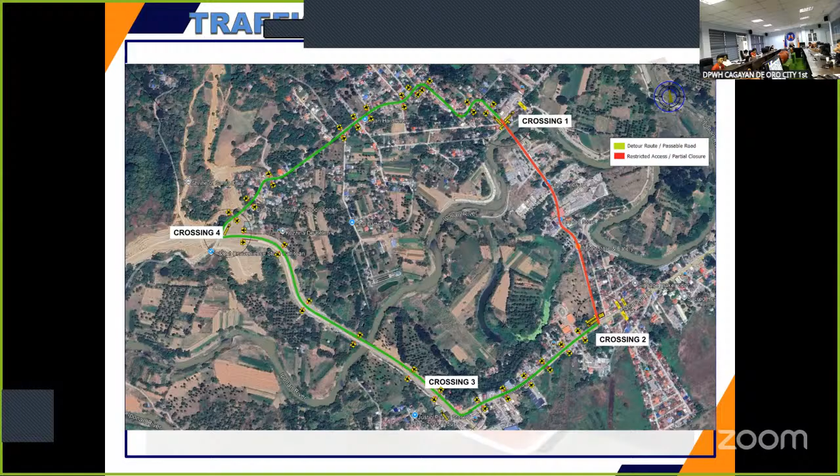So I will also discuss the traffic management scheme for this project. We have proposed that the road leading to the said bridge will be temporarily closed. Only pedestrians or light vehicles will be allowed to pass this area. We have already acquired permission from the Road and Traffic Administration that we will reroute the passage from this bridge dito sa Opol Kanituan bypass road. So that is the end of presentation. Thank you. Any questions?

Thank you, Engineer Rocky Mortis. So do you have any clarifications or questions regarding the discussions of the details of the project? There is none. How about from our online viewers? So again, reminder, this project is subject for improvement. So now let's proceed for our last project we discussed for this afternoon.

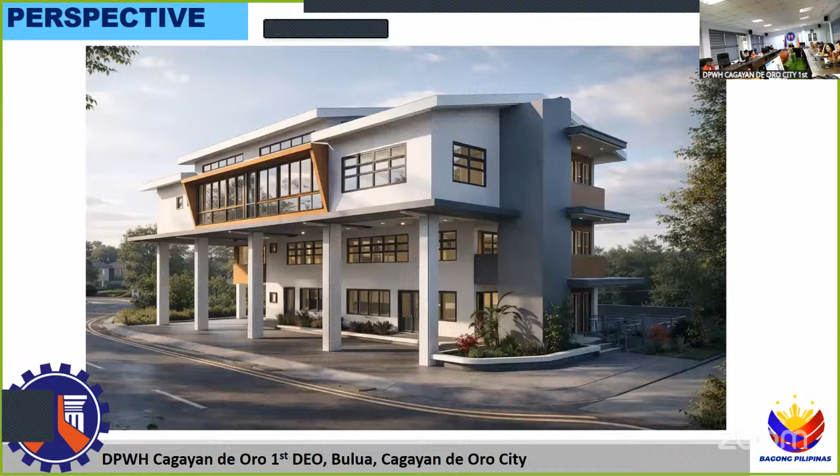So this is the perspective of the building. We have a 3-story building with a half-exposed building on the ground, first and second floor. As you can see, we have an elevator, but it's only for provision, and a ramp. And this is the site development plan.

For the architectural plan, we have the ground floor plan. We have parking areas for heavy equipment, trucks or any vehicles, a ramp, and 2 concrete stairs on both sides. We also have the office space and toilets, including PWD toilet, and a bench plant box.

On the second floor, we also have an office space and toilets, also with PWD toilets, and a mini lobby porch on the right side.

For the third floor, we have the multi-purpose hall, which is good for an evacuation area. We also have toilets, a pantry, and PWD toilets as well, and also a lobby mini porch.

So we have the reflected ceiling plan on the ground floor plan. Mostly inside of the building, we have acoustical ceiling board. And for the second floor plan and third floor plan.

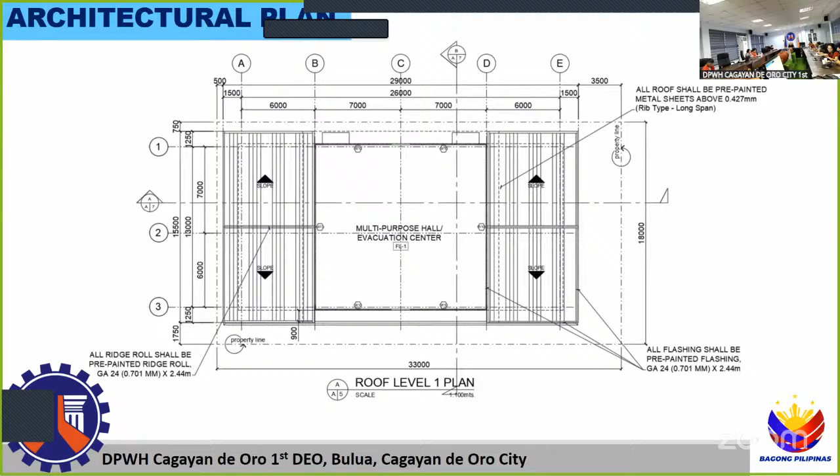For roof level 1 plan, we're using a dual slope roof. And also for the roof level 2 plan, which is mostly the main roof, is also a dual slope.

So for elevations, we have the front, the rear, the left side, and the right side view elevation.

So for the sections, we have the longitudinal and the cross section. Also, we have schedule of doors.

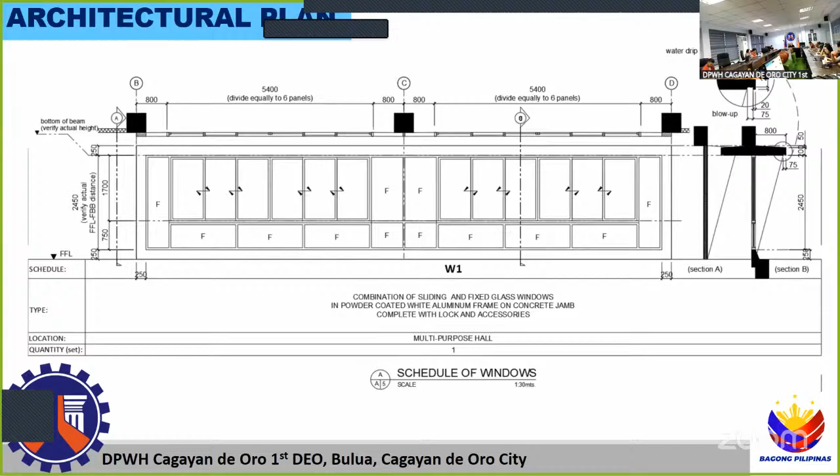Mostly our doors are combined with a fixed window. And also we have windows, sliding windows, sliding windows combined also with fixed windows. We also have awning windows, and we also have louver blocks.

So we have the ramp details. As noted, the slope gradient is at 1 in 15 meters as per the amended IRR of BP 344.

So the sections and the details. Also for the stair detail 1, this is at the right side, and the stair detail 2 at the left side. And details, and the railing details.

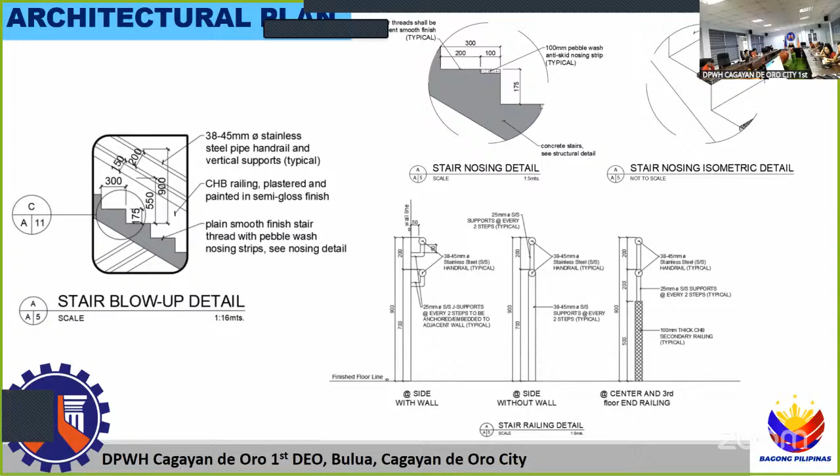We also have carpentry, which is for the cabinet detail for the pantry, and more details for our ceiling. And for the compliance of our BP 344, for the typical PWD toilet detail.

And now for the foundation plan, wall footing plan with the detail of wall footing. The roof framing level 1 plan, and the roof framing level 2 plan. So this is the schedules for our column, footing, and our beams.

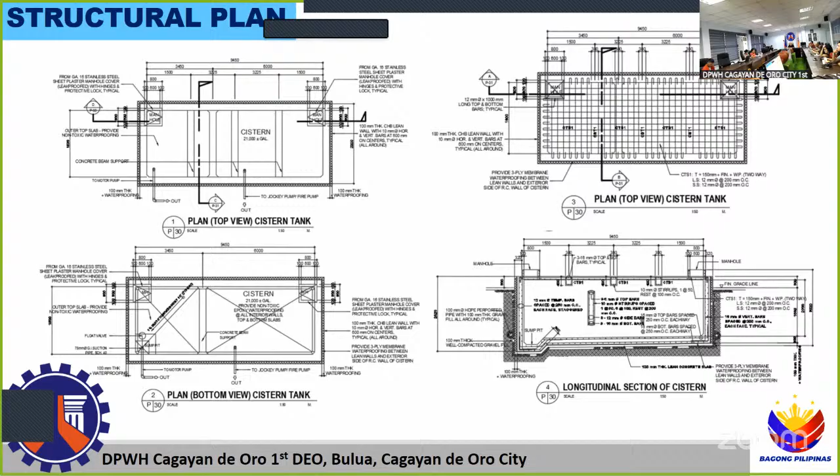We also have detail for our cistern tank, and for our septic vault as well.

Now for our electrical plan, we have the ground floor lighting layout plan, the second floor lighting layout plan, and the third floor lighting layout plan.

We also have the power layout plan at the ground floor, second floor, and third floor. We also have CCTV layout plan at the ground floor, second floor, and third floor as well.

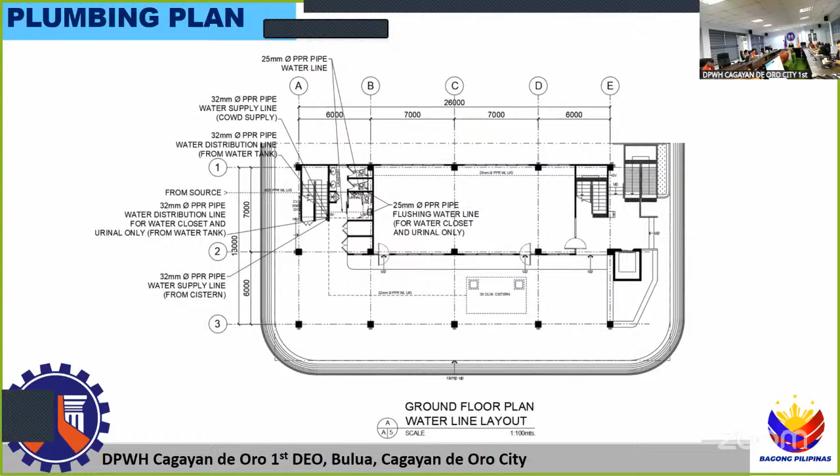And water line layout, this is for the plumbing plan. This is the water line layout for the ground floor plan, the second floor plan, and the third floor plan.

And for the sewer and vent layout, which is for the ground floor plan, the second floor plan, and our third floor plan. And for storm drainage layout, for the ground, second, and third floor plan.

So these are our summary of quantities. For Part B: B31, permits and clearances, 1 lump sum. B51, project billboard signboard, 2 each. B71, occupational safety and health program, 1 lump sum. B91, mobilization and demobilization, 1 lump sum.

For Part C, earthworks: 801-1, removal of structure and obstruction, 1 lump sum. 803-1A, structure excavation common soil, 878.43 cubic meter. 803-A4, individual removal of trees, to be explained later, 2 each. 804-1A, embankment from roadway structure excavation common soil, 30.14 cubic meter. 804-7, gravel fill, 42.13 cubic meter.

Part D, reinforced concrete: 901C, structural concrete, 165.61 cubic meter. 902C, structural concrete class B, 28 days, 9.50 cubic meter. 902-1A1, reinforcing steel, deformed, grade 40, 10,687.97 kilograms. 903-2, formworks and false works, 747.25 square meter.

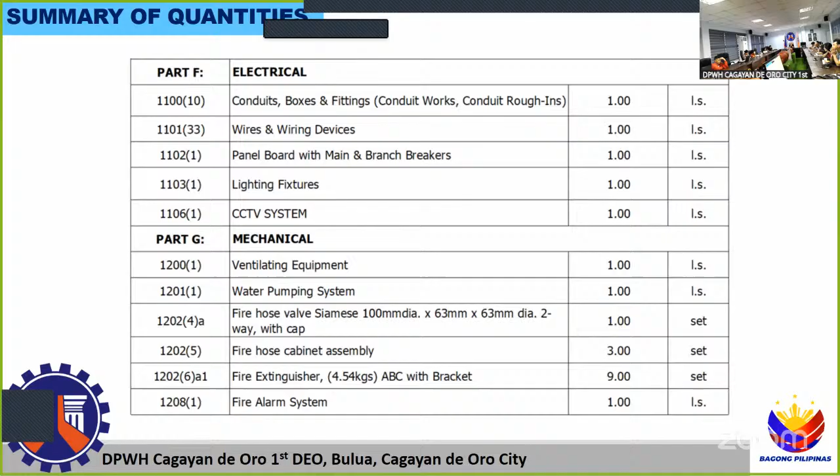These quantities are still subject for changes and for the bid bulletin. So we have, of course, our safety warning signs.

And for the lump sum for our quantities, especially the other general requirements, is included with building permit, all professionals, and for our Bureau of Fire. And for the carpentry...

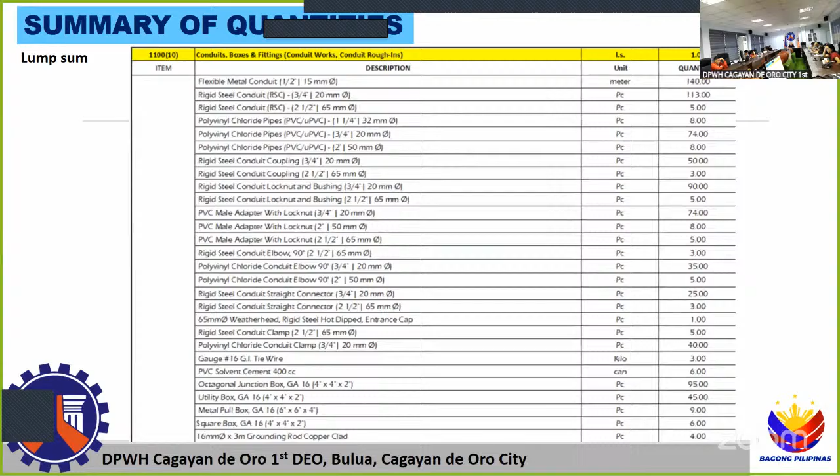And for the lump sum for our electrical, we have the conduit boxes, wires and wiring devices, the panel boards, lighting fixtures and lamps, and our CCTV system.

For the ventilating equipment: air conditioning system, fire hose cabinet assembly, fire extinguisher, fire department connections, fire alarm system.

And for our MER or minimum equipment requirement, we have the backhoe, 1 unit leased; concrete vibrator, 2 units owned; dump truck, 1 unit leased; bagger mixer, 1 unit owned; plate compactor, 1 unit owned; grinding machine, 1 unit owned; bar cutter, 1 unit owned; bar bender, 1 unit owned; welding machine, 1 unit owned; material testing, 1 unit owned; minor tools, 1 unit owned; and chainsaw, 1 unit leased.

So that is for this project, and these are still subject to the bid bulletin. Thank you. So any questions and clarifications?

Emil, can you go back to the first slide? I would like to make a correction. Yes, sir.

Okay, so I would like to make a correction regarding the ABC. So the ABC of this project is 40,849,973 pesos and 80 centavos. Okay sir, noted.

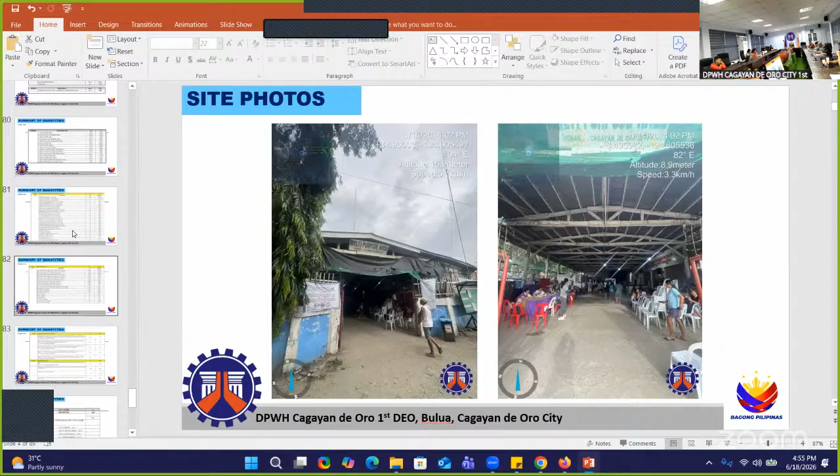Is it applicable, sir, to the budget for FDAS and fire protection if ever? Our answer is that the requirement for OBO is already included in the plans, but regarding implementation, it depends on the budget. The requirement is in the plans, then with the Bureau of Fire and OBO. So if possible, sir, if it can be incorporated into the budget, it can be included. So it's not yet sure, sir, if it's applicable to the budget. Yes, sir. For now, let's follow the minimum requirement which is the fire extinguisher, then carry the dry pipe system. The wet pipe system is incorporated only with regards to OBO and Bureau of Fire.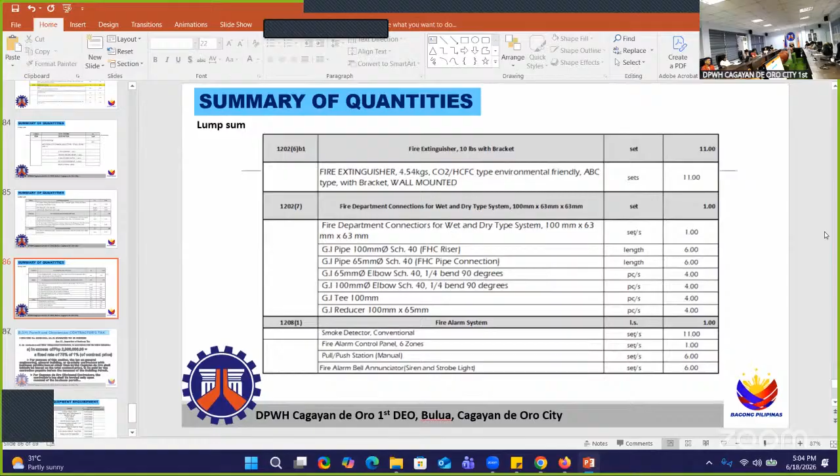So, okay, is there any clarification? Okay, so how about from our online viewers? There's none. So with that, that's all for the discussions of the project details. So now may I call the members of our BAC secretariat to discuss our procurement requirements, the date of opening of bids and other matters. So I call Engineer Sherland to discuss.

Good afternoon, Mr. Vice Chair. Good afternoon, everyone. I will be discussing the procurement requirements and procedures for these infrastructure projects. So here we have the civil works projects with their corresponding contract IDs and the approved budget for the contract.

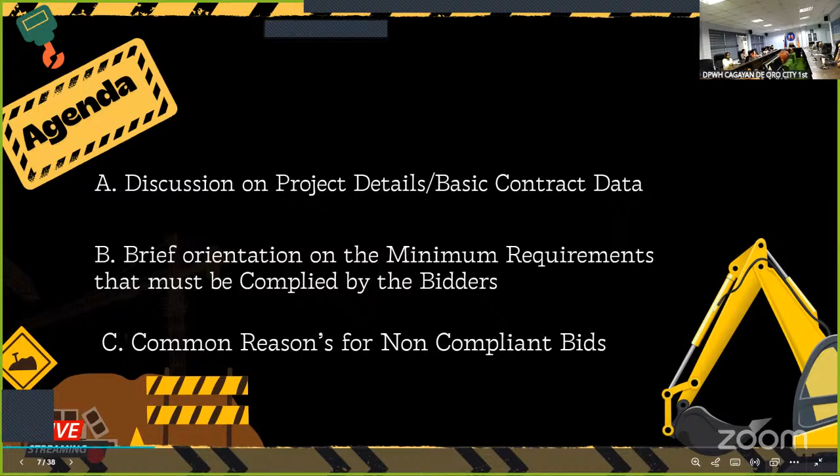So for the agenda, we'll discuss the project details and basic contract data. Then next, the brief orientation for the minimum requirements that must be complied with by the bidder and the common reasons for non-compliant bids.

So for the procurement schedule, the buying of tender documents is until June 30, 2026 at 9:30 a.m. only. The deadline for the submission of bids will be on June 30, 2026 until 10 a.m., and the opening of bids will follow right after the deadline or the dropping of bids. The bid submission may be done manually or electronically. However, bidders should only select one mode of submission, either manual or electronic.

So here we have the manual submission, in which we have the two envelope system. The first envelope will contain the technical documents and the second envelope will contain the financial documents. And they have the original copy, copy 1, and copy 2. For the electronic submission, the details are stated in the bid data sheet in accordance with DEO 87 Series 2020.

Bid proposals may be submitted through an authorized representative together with an original notarized special power of attorney for sole proprietorship, or board, partnership, joint venture resolution with secretary certificate for corporations, partnerships, joint ventures or cooperatives, which is contract specific, and presentation of a company ID or any government-issued ID to ensure the representative is an official member and to prevent fraudulent actions such as unauthorized use of another contractor's eligibility for personal gain.

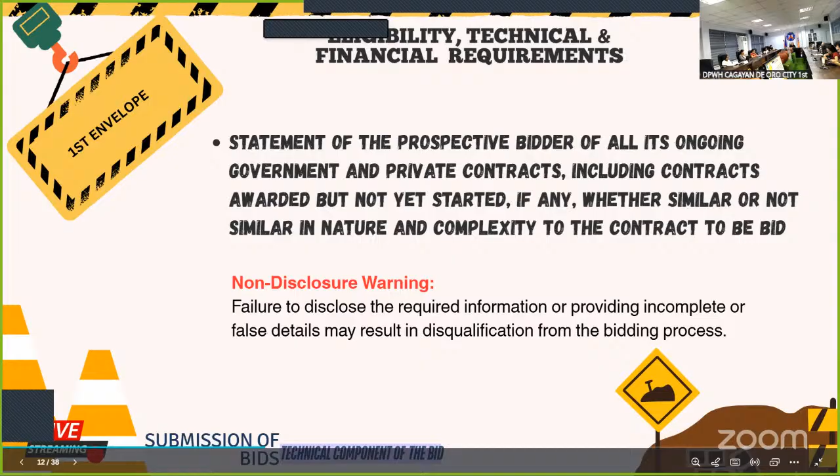So first, for the first envelope, the bidder must provide a valid and updated PhilGEPS registration certificate in platinum membership, all pages. Failure of the bidder to update the PhilGEPS certificate of registration shall result in an automatic suspension of the bidder's certificate. Next, the bidder must provide the statement of all of its ongoing government and private contracts, including contracts awarded but not yet started. Please take note that failure to disclose the required information or providing incomplete or false details may result in disqualification from the bidding process.

Next, the bidder must provide the single largest completed contract or the SLCC. Next is the PCAB license or the special PCAB for joint venture. Next is the bid security. We have 4 forms of bid security. The bidder will only choose one form to be submitted. Here we have the cashier's check, the bank guarantee, the surety bond, and the bid securing declaration with their corresponding amount of bid security. Next, we have the bid securing declaration in its standard form.

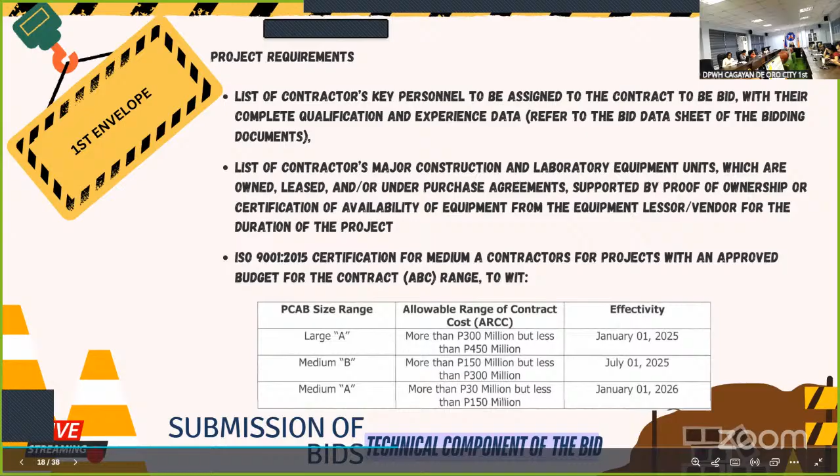Next, the bidder must provide an organizational chart for the contract to be bid, the list of key personnel, and the list of contractor's major equipment, major construction and laboratory equipment, which are owned, leased, or under purchase agreement. And for projects with an ABC of more than 30 million, we have an additional requirement, which is the ISO 9001:2015 certification for medium A contractors for projects with an approved budget for the contract as displayed. Next, this is the standard form for the key personnel. Standard form for the major equipment units.

Next, we have the original and duly signed omnibus sworn statement, the net financial contracting capacity, and if applicable, a joint venture agreement. And this is the standard form for the omnibus sworn statement. And for the additional requirement, the general information sheet reflecting the beneficial ownership information duly received by the Securities and Exchange Commission for corporations.

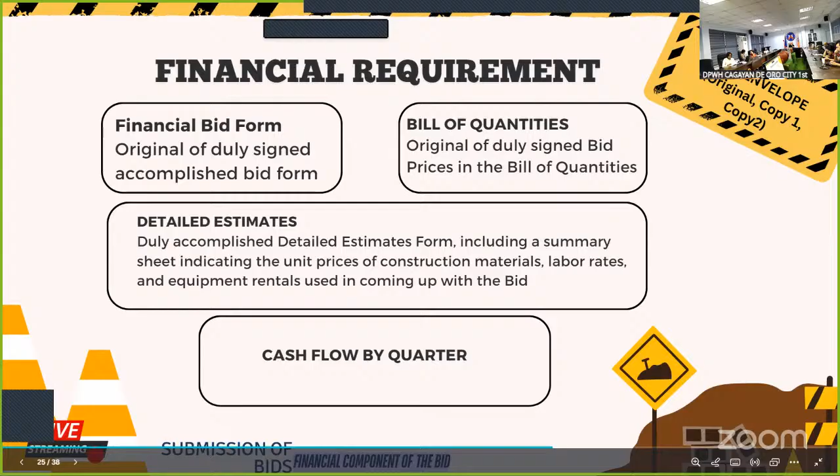Next, for the second envelope, we have the financial requirement. The bidder must provide an original and duly signed accomplished financial bid form, bill of quantities, the detailed estimates, and the cash flow by quarter. So these are the standard forms for the bid form, the bill of quantities, the detailed estimates, and the cash flow by quarter.

So common grounds for non-compliant bids, from observations of previous procurement activities: missing or incomplete required documents, unsigned or improperly signed forms, incorrect or inconsistent computations in the bill of quantities or financial proposal, expired or invalid licenses and permits, non-compliance with the specified technical requirements, and failure to use prescribed forms. Next, we have the preventive measures and recommendations: carefully checking the validity of documents, ensuring all forms are signed by the authorized signatory, using the exact forms provided in the bidding documents, verifying computations before submission, organizing documents according to the prescribed sequence, and asking clarification from the BAC Secretariat within the allowable period.

So that is all, Mr. Vice Chair. Back to you. Okay, thank you, Engineer Sheila. So, do we have any clarifications or questions regarding the discussion of the procurement requirements?